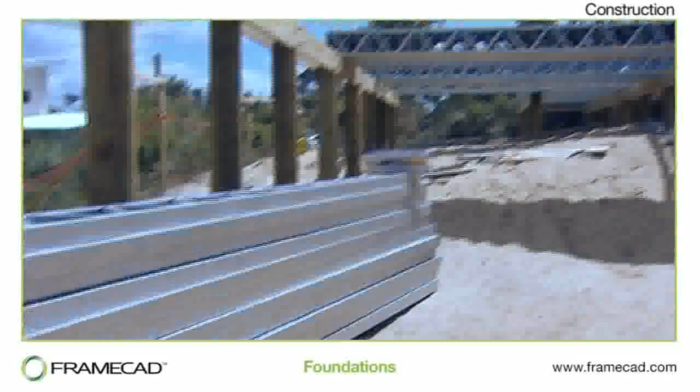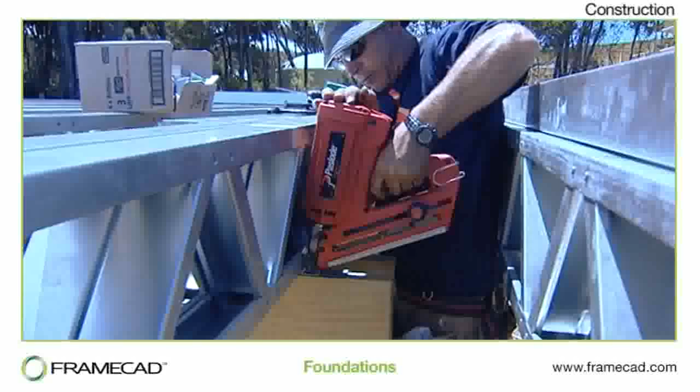Construction. Because FRAMECAD framing is precision manufactured to an accuracy of just 1 millimeter, it's critically important to construct the foundations and floor with the same degree of precision. The floor must be level. Any variation greater than 5 millimeters per 10 meters will create problems that can delay build time and compromise finish quality. The floor level should be carefully checked during construction using laser level technology.

Accurate diagonal dimensions should be provided with the foundation plans so the builder can check that the floor is square prior to erecting the framing. There are many different ways to erect steel frame walls and trusses. Often, the method used will depend on design factors, building regulations, and environmental considerations.

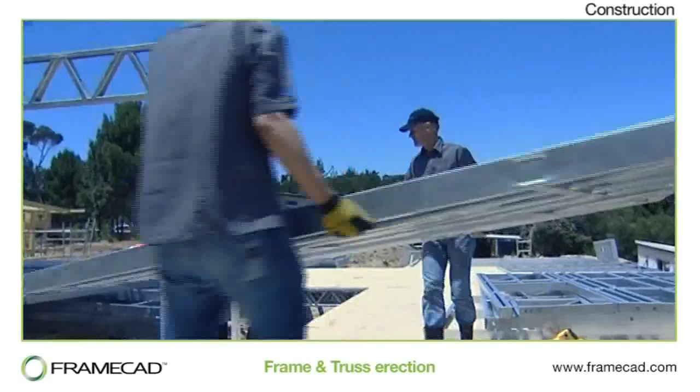In most cases, walls are erected starting from the rear of the building and progressing to the front. However, you may have to deviate slightly from this plan if any oversized walls are involved, and allow extra space to accommodate them during the building process. The fixing position for each wall can be pre-marked with chalk lines. Alternatively, the position of the triples or plaster studs on the framing will provide an accurate guide.

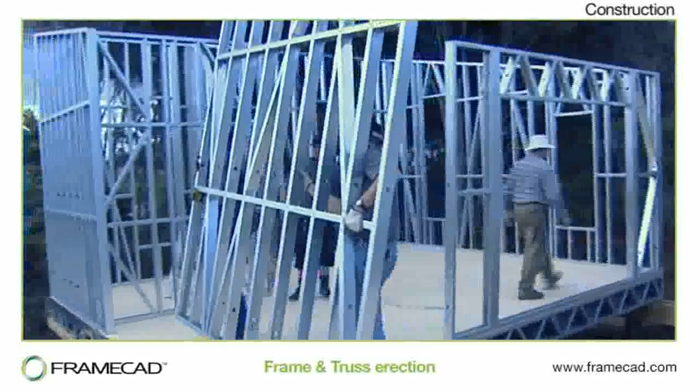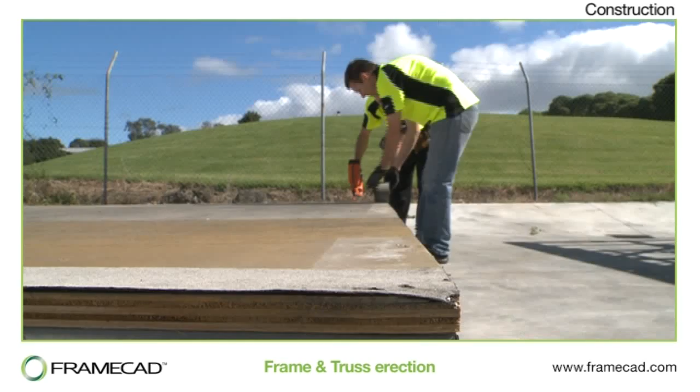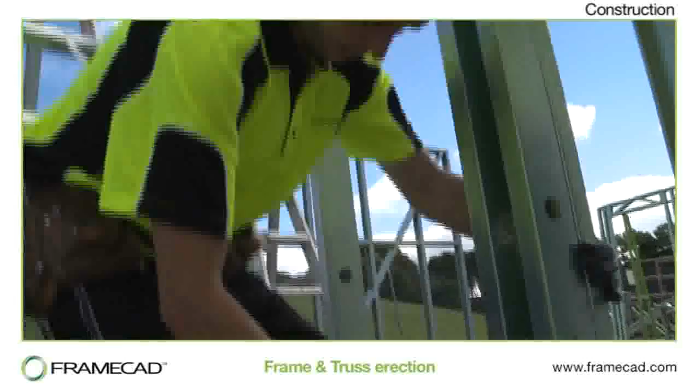It's important to ensure that the steel framing does not come into direct contact with either concrete or treated timber. Standard practice is to use a barrier such as a damp-proof course in between these surfaces to avoid the possibility of adverse chemical reactions. Each wall frame is stood up and screwed to an adjacent wall using self-drilling FRAMECAD screws. The task is much easier when you use a screw that sticks to the bit, so the screw won't fall off when working at awkward angles. If the floor is level and dimensionally accurate, the framing should fit together without requiring any adjustment.

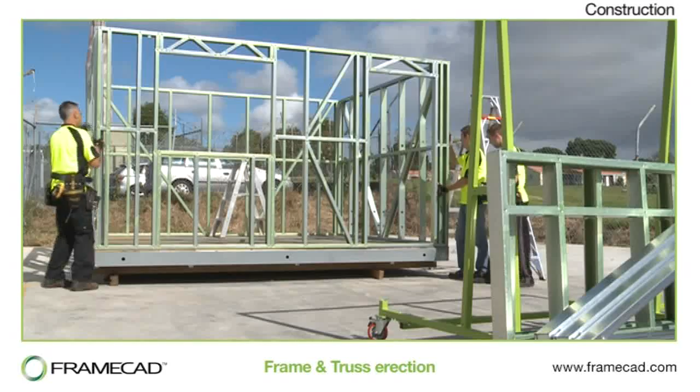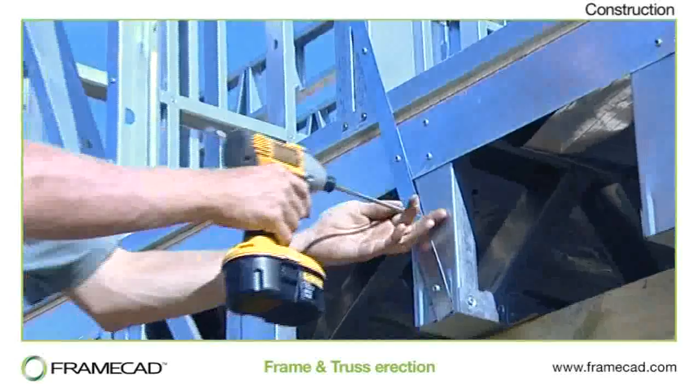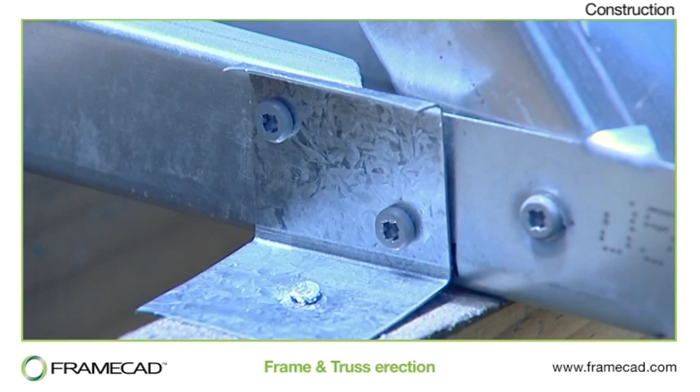Trusses are usually positioned over studs to support the roof loads. Check the frame layout drawings to determine the position for each truss. Once all of the walls and trusses are assembled, straps, braces, and tie-down connectors are secured. These can also be used to secure floor trusses to walls. The steel coil used to produce FRAMECAD profiles can be used as additional reinforcement to enhance joist end stability and to strengthen lintels above windows. 90-degree angle is used for additional backings. Walls are secured to the concrete slab by either chemical set bolts, cast-in strapping, or sleeve-type expansion anchors.

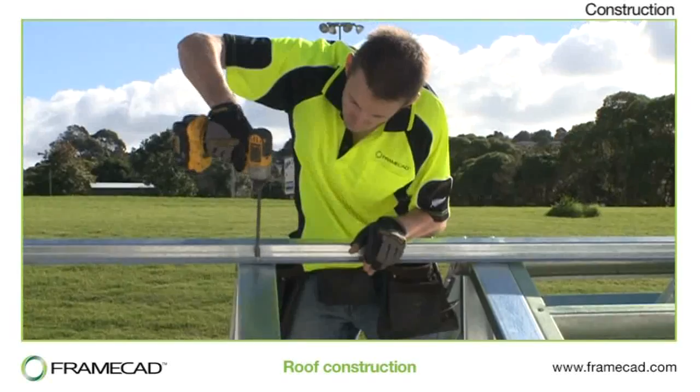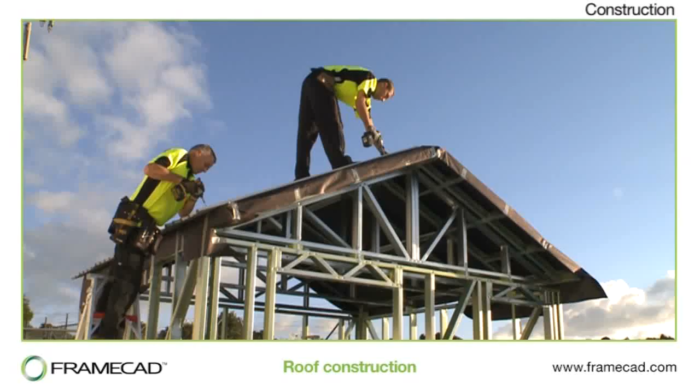The roof provides weather protection and is usually the first part of a building to be completed. A moisture barrier should be laid over the top of the roof trusses. In some instances, a radiant barrier like aluminium foil is used. A wide variety of roofing materials can be used in steel-framed buildings, including color-coated steel in roll-formed profiles or pressed tiles. Other traditional roofing materials such as shingles or tiles are also possible.

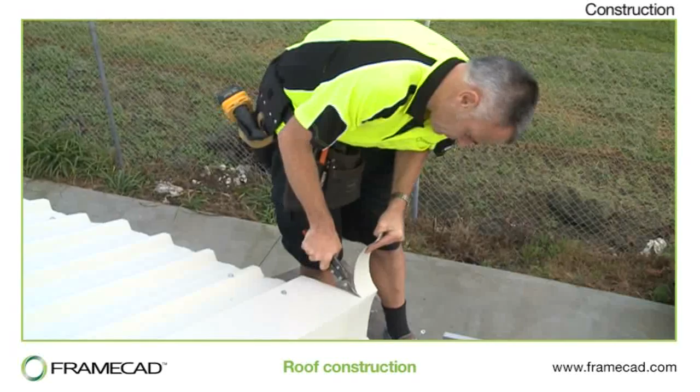Once the roofing is fitted, barge boards and fascias of steel or timber are fixed to the roof perimeter. Then the guttering is fitted and soffit linings installed. The most commonly used soffit lining is made of fiber cement, although steel and timber soffits are also possible.

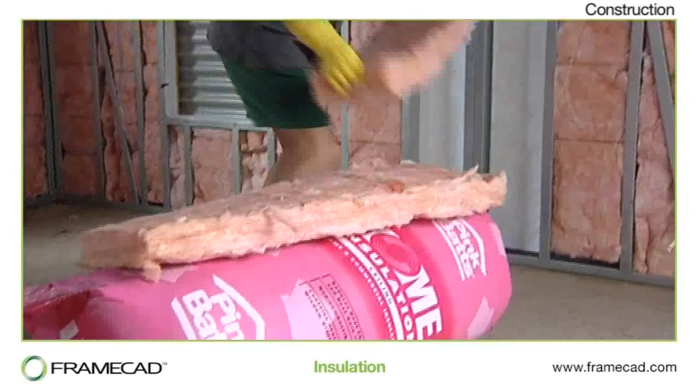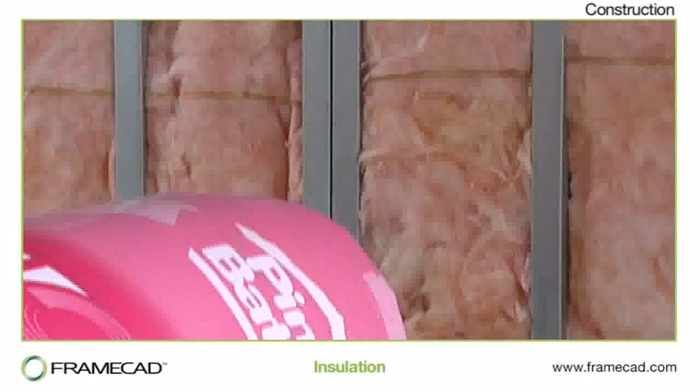Many types of insulation can be used with light gauge steel framing, and it is important to use the correct type for your environment and to meet building code requirements for your region. The amount of insulation is often limited by the thickness of the framing used. With exterior insulation, the thickness of the insulation is not constrained by the thickness of the framing.

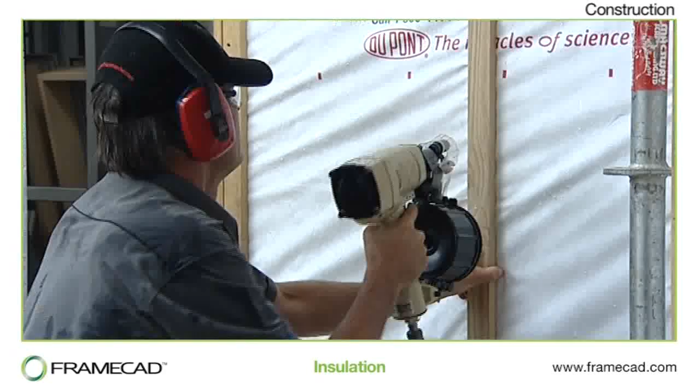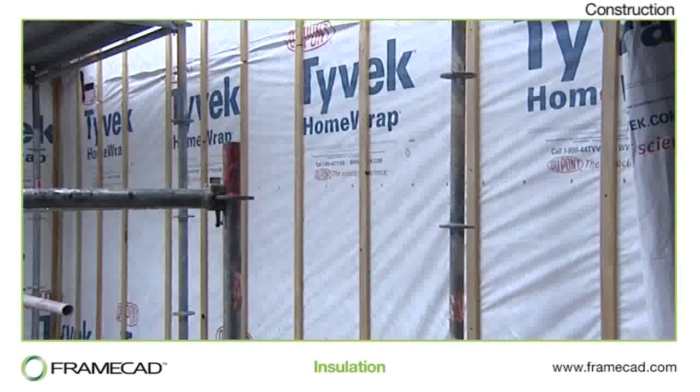A thermal break should be used between the framing and the cladding to help prevent heat loss and condensation, and to keep the dew point outside the framing. It is also important to use a moisture barrier. In this instance, the framing is wrapped with a breathable building wrap. All external wall openings should be waterproofed using window tape.

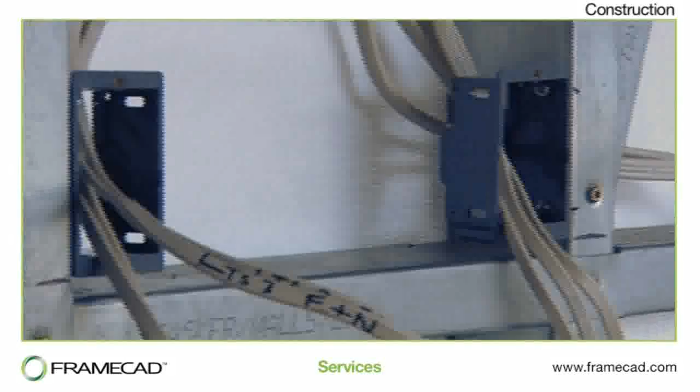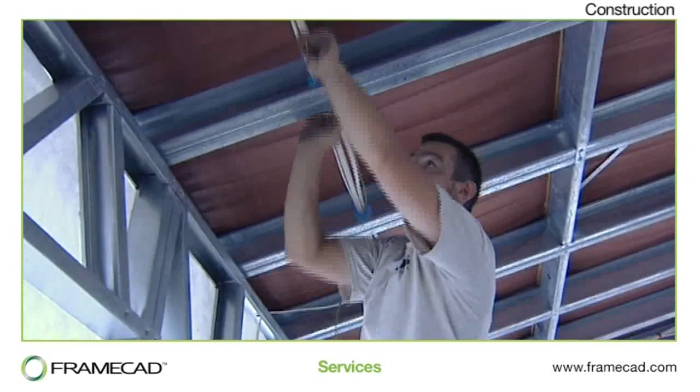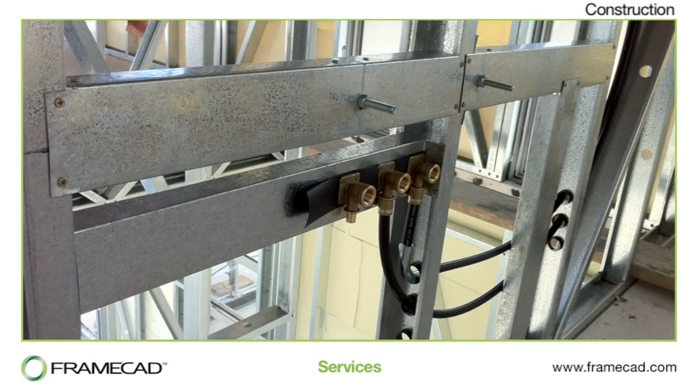With the FRAMECAD system, service routing is predetermined during the design stages and service holes are pre-punched as the framing is manufactured. Insulating grommets are inserted into the holes prior to wiring or piping being inserted. Additional service holes can be created on site using a manual service hole punch or a cordless punch. Hole saws should not be used as they leave sharp edges and produce swarf. Supports for tapware and other fittings can be easily incorporated using timber or steel nogs or purpose-designed brackets.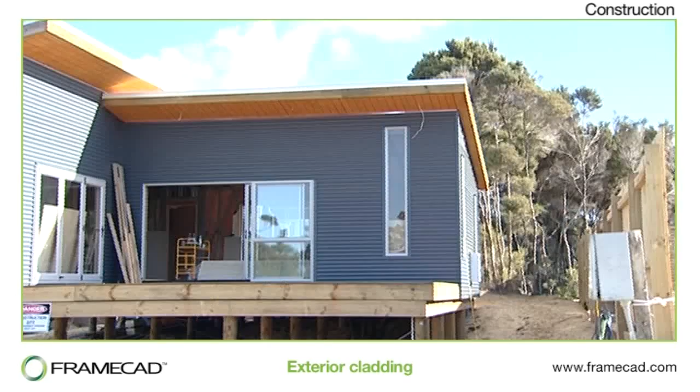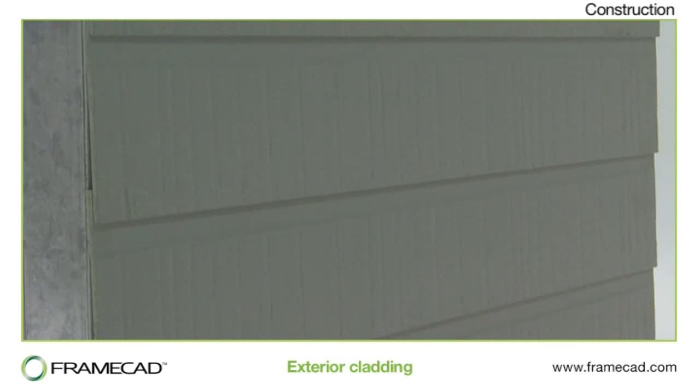All types of exterior cladding can be used on light gauge steel framing in the same way as they're used on any other framing. The only variation is the type of fasteners used. Pre-finished cladding provides a high-quality finish and can be installed very quickly, so projects are not delayed due to poor weather. Fibre cement claddings are popular due to their versatility and durability. Another popular option, where the traditional look is desired, is fibre cement siding. Render systems can be combined with external EPS insulation to provide a traditional solid look for upmarket villas.

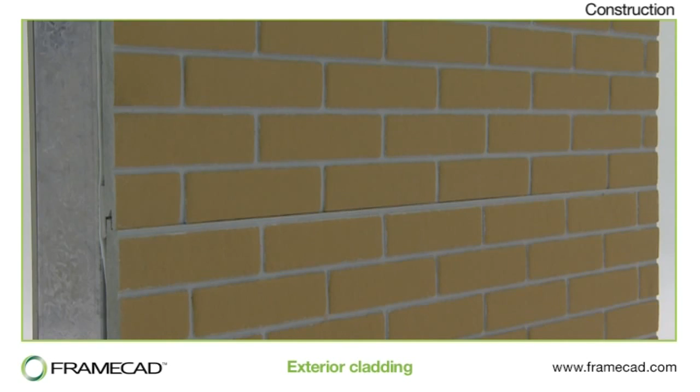Brick veneer claddings are often used with steel frame construction because it means the building can be quickly framed and closed in, enabling interior work to commence almost immediately. There are many other cladding options, including pre-painted steel and sandwich panel systems. Make sure you get expert advice on the correct type of cladding to suit your local environment and building regulations.

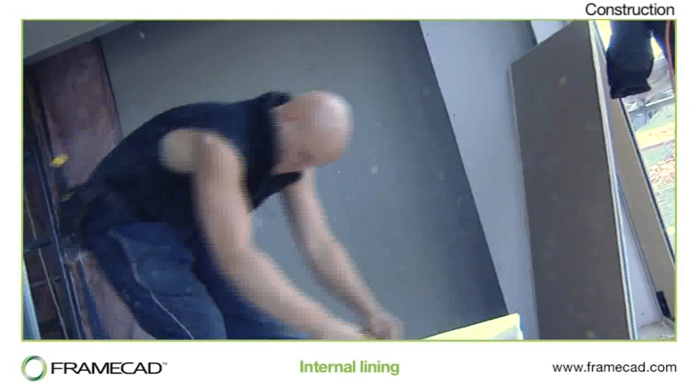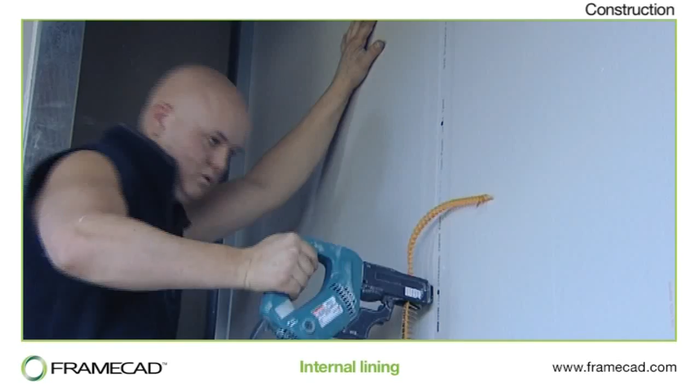A wide range of internal linings can be used in steel frame buildings, and the fasteners you choose will depend on the type of lining used. Drywall or gypsum is the most common. Sheets are screwed to the steel framing, and sometimes glued as well. Drill-tip drywall screws can be inserted with less effort than standard sharp-tip screws.

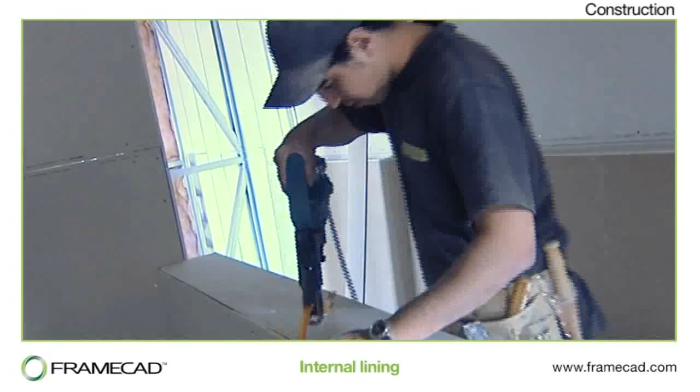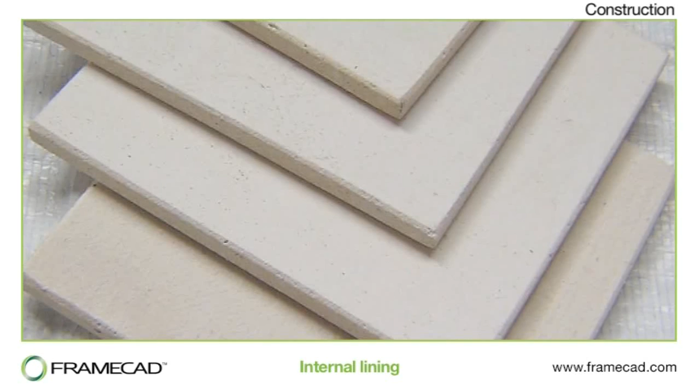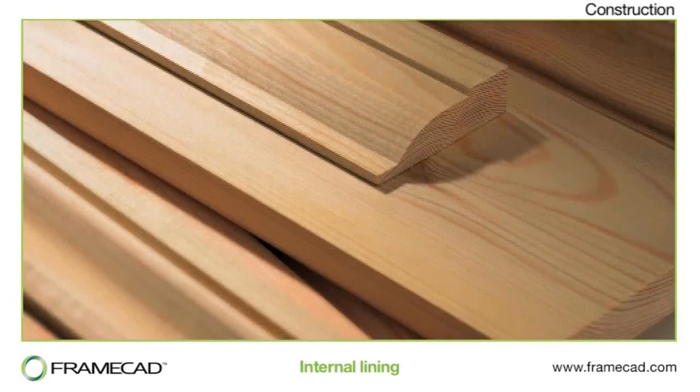Hard interior linings such as fibre cement board are often used where higher impact resistance is required and in wet areas such as bathrooms and laundries. These can be fixed using winged drillers or nailed using ballistic nail systems. Magnesium board is another option. It provides superior fire resistance, which is especially important in multi-story apartments and worker accommodation. Architraves, trim and scotias can be fitted by gluing and then nailing using ballistic panel pins.